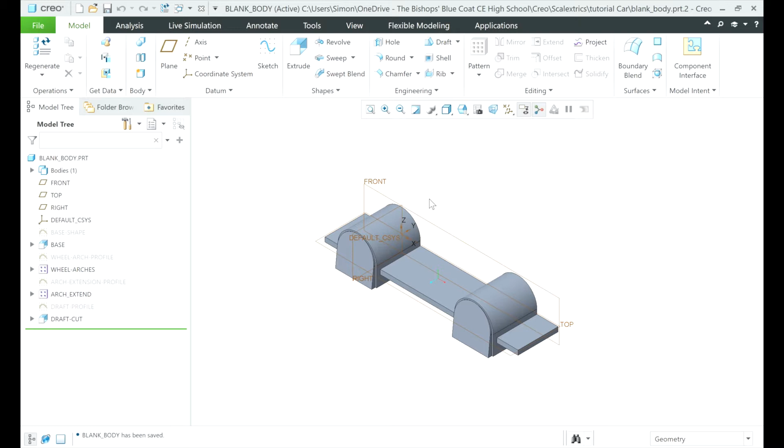We've loaded the blank body from the Scalextric4Schools Facebook page in the files section. I'm going to orientate it so I can see it from its side view, because we're going to add an image to the side that we can use to help trace around the outline of the shape. So I'll go up to View, then find one of the hidden images, which is under Model Display and Images. The toolbar across the top changes.

We click on Import, and I'm going to click on the front plane, as that's the plane I want my image to go on. I've already saved the side elevation in my working directory, so I'll click on that and press Open. You can see in the preview the car we're going to do - it's based on a Golf.

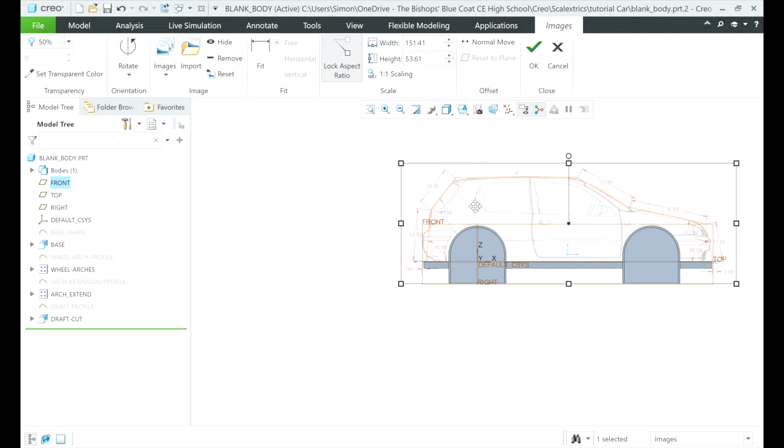Now we just need to manipulate that and move it so it's roughly the same size, so the space between the wheels is roughly the same as what we've got on our block. So we can stretch it. I'll make sure I'm on the front view, and move it until I'm roughly happy that the two wheel arches on the image line up with the two wheel arches on the blank mould. That looks pretty good.

We'll press OK. And while we're in this view, we'll go back to the word model from the top ribbon and click on extrude. I'm going to extrude onto this surface, press extrude onto that front plane.

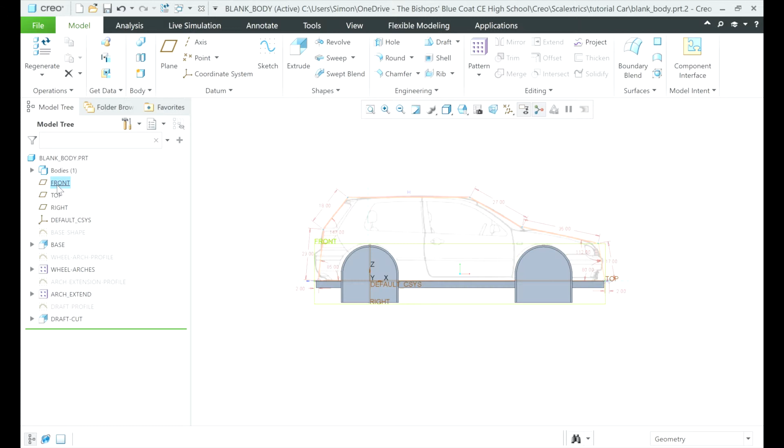So we click the extrude button, and I now need to tell it the front plane. I thought the front plane was already selected, but it doesn't appear to have been. So I'll go under placement and click on the word front from my model tree. You'll notice the ribbon changes again at the top.

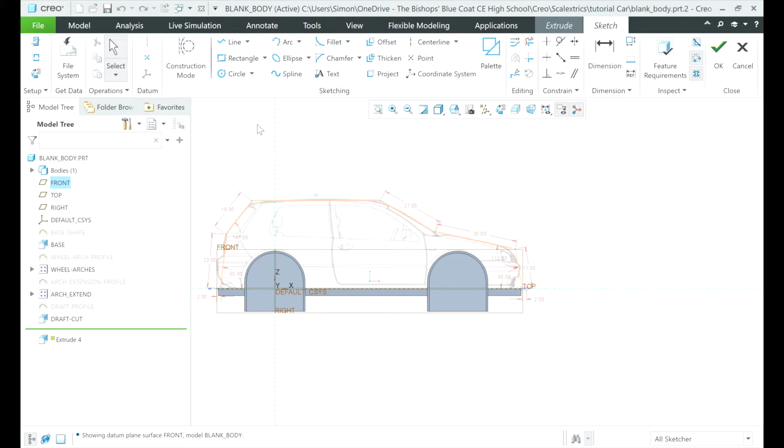And I'm now going to use the line tool and go from one edge to the other. To zoom in I just used my scroll wheel on the mouse and rolled it forward. Now I've decided to keep this pretty square to start off with.

We'll add the curves and rounds a little bit later on. Each time I want to leave a datum point, I'm just clicking once with my mouse - you'll see a little yellow flash appear on the screen. Remember, when I'm zooming in and out, it's just using the scroll wheel on the mouse. So we go down to that bottom point, and I'm going to connect that from one side to the other, using the scroll wheel to zoom out and back in again.

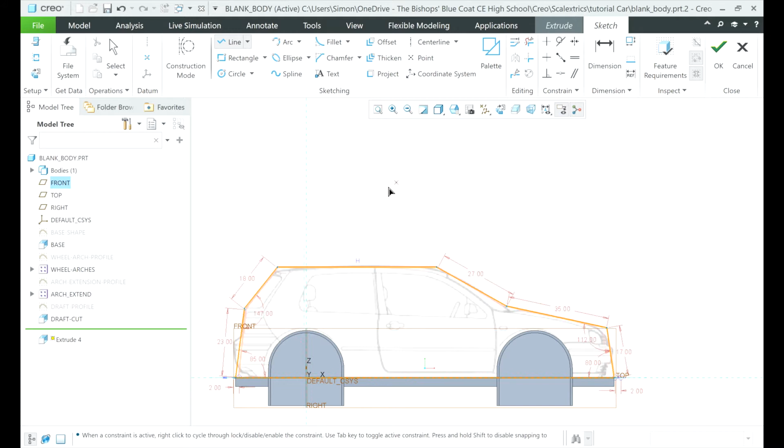So that gives us a completed shape. We can check that by pressing the select button - it's gone nice and yellow, so that's all good and okay. So we've got a completed shape there.

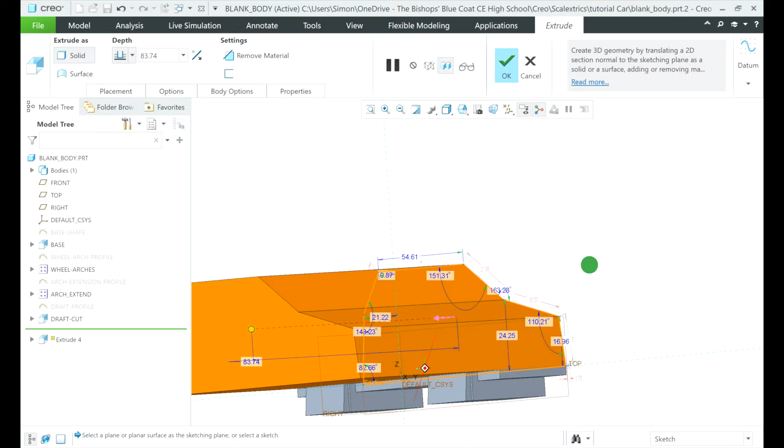So I'm next going to press OK, which is in the top right, the green tick. We press that, and it's now gone orange, which means it's a 3D shape. I just used the scroll wheel there, and by holding it down and moving the mouse, I can orientate the model.

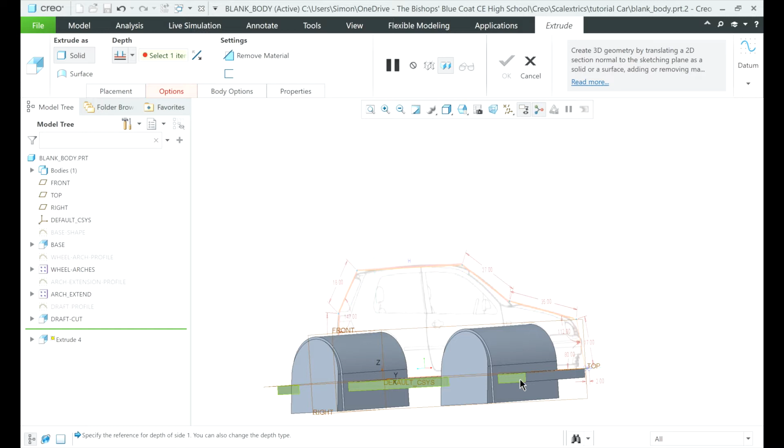Now under the word depth, I'm going to select the little arrow and click the bottom option, which is basically going to align the extrude I've just done to one of the edges we already had on our model. I'll click on that thin edge just there - it's highlighted green. So I now know the width of the car is locked into that base. We can just press OK to say we're happy with that.

Now we've got that basic shape. It is quite blocky, it's got lots of angles on it, so we're just going to soften these off. This is a part where it's up to you which angles or radiuses you use on your curves. So we go to the round tool, which is below where it says flexible modeling, and I'm going to start clicking on some of these edges and rounding them off. Quite often this is just done by eye, what looks right.

So I can just drag the little parts there. If you wanted to zoom in, you could use the scroll wheel. I'm just dragging that round until I'm happy with it, then move on to the next one. Now that's at 6.57. Once we're happy, we'll click off and decide what round we want to do.

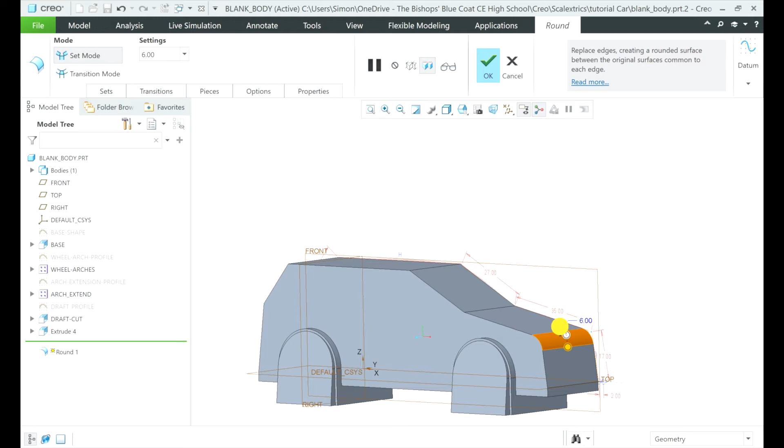Again, these are personal to you. You don't have to follow the exact measurements when doing the round. So I'm going to press OK, and I'm going to leave that rounded.

Spin the mouse around using the middle mouse button or the scroll wheel so we can see the other side of the car. I'm now going to start applying some rounds to the car to give it a bit more of a streamlined and more modern shape.

So I'm going to click on this back one first, just on that edge, and again find the two little yellow dots, get your mouse on one of them and just drag it out. You might need to use the scroll wheel just to zoom in.

So there we go, we just zoom in there so we can see them little dots, and I'll grab one of them and start pulling it out, and you can see as I pull the mouse away, the radius of that curve increases. So 8.5, we're quite happy with that. It looks okay. We could go more if we wanted to.

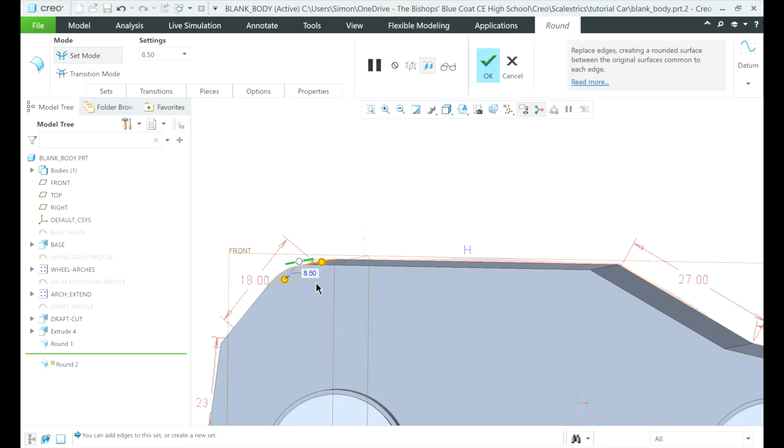So I'm going to stay with that radius. I'm just going to increase it up to 12, and click on a few of the other lines. Let's just stay with that 12 radius for the time being. Again, remember, it's personal to you. If you want to change these numbers, do what works for you. It's your design, remember.

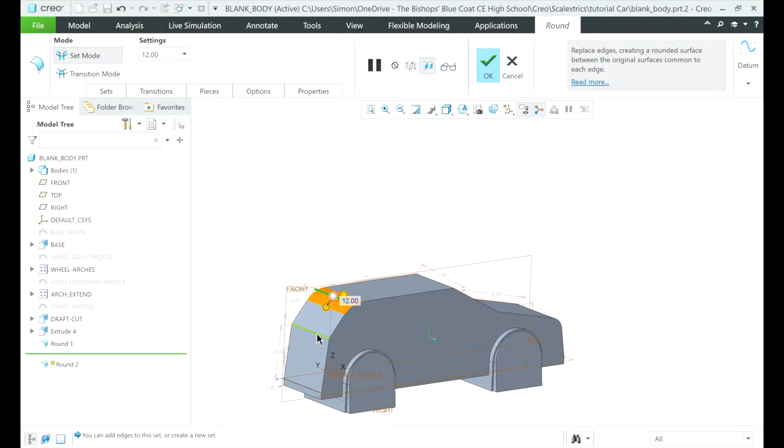So I'm just going to use the middle mouse button, spin it round on that scroll wheel, click the back one there, hold down the scroll wheel and move my mouse. I'm going to click on the top by the A pillar, and then again at the bottom by the edge of the windscreen, or where the windscreen would be. Once I'm happy with that, I'm going to press OK.

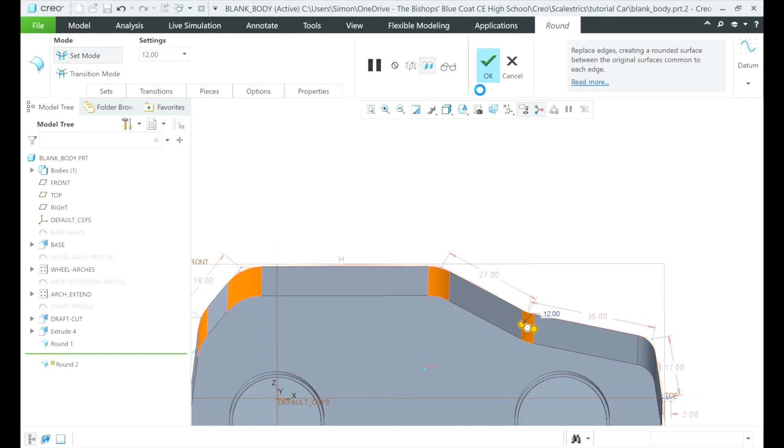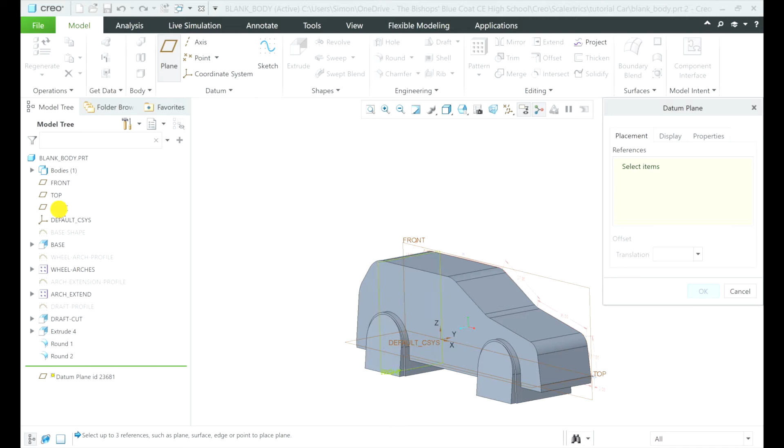My middle mouse button again on that scroll wheel, and what I'm going to do is put a work plane at the front of the car, just so we can do that front elevation. So we click on plane, I'm going to click the right work plane, so I can do that from the model tree if you can't quite find it, and it comes up 105. I'm just going to make that 110 just to ensure I've got clearance from the front of the car. When I'm happy with that, we're going to press OK.

Now what we're going to do is repeat our first step where we added the image. So we go up to View, click on Model Display, click on Images, click on Import, and select that new plane we just created, and again Working Directory, this time the front elevation. So you can see the picture of the front of the car there. It's coming on the wrong plane, so the wrong way up, so we can just rotate that round.

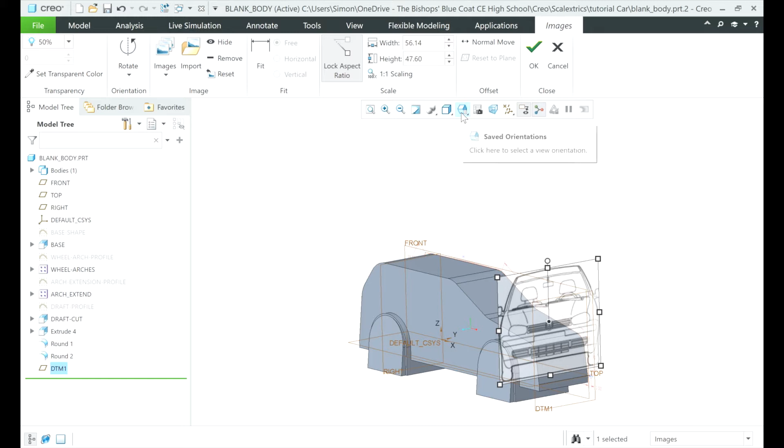This time, when we are manipulating it, we're going to click the right plane, so we can just click there on Saved Orientations and click right. Clicked front by mistake, because I'm thinking it's the front of the car, but we want to click the right because that's the plane we're looking at.

This time we want to manipulate it so that half the car, or the middle of the car, is lined up with the edge of the block. We can then ensure the roof, wheel arches, and everything are roughly in proportion. So again, scroll wheel will let you zoom in, and we're just going to manipulate that until we're happy with our positioning. We can move it up and down until we're roughly happy with it. If it's not perfect, it's not going to matter too much.

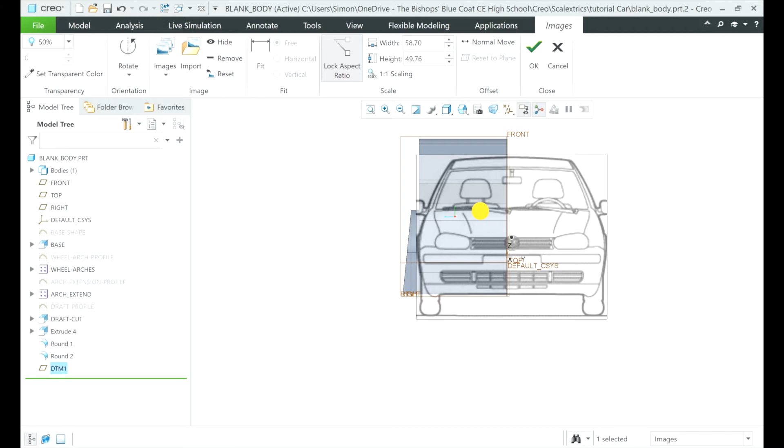Remember, this is just as a guide to help you. It's not set in stone. We can change and make changes from that. I'm just going to stretch that up until I'm happy with it, and when I'm happy with it, just like before, we will press the green tick.

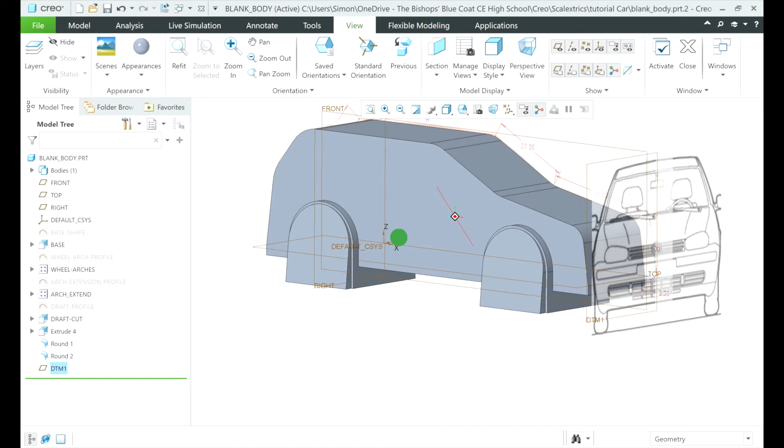Once we press the green tick, middle mouse, I'm just going to spin it round on that scroll wheel. I'm going to show you an alternative way first, which is using the chamfer. You may wish to use this. It's entirely up to you.

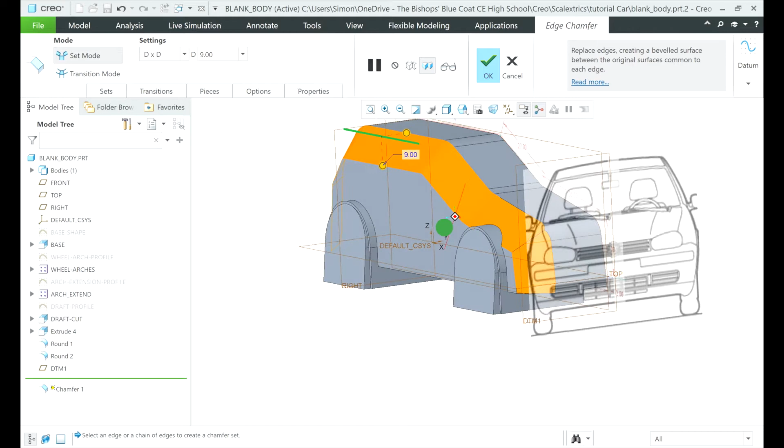So I click chamfer, very similar to a round, but it's putting a chamfer on the edge. We can drag that down and you can create a chamfer. Now you might decide that's right for your design, you might not, it's entirely up to you. In this instance, I don't think it's quite right, the look I'm looking for on this design.

So I'll just press cancel. We've previewed it, we're not happy. We've done some development as we've gone on, so we can press cancel and press yes.

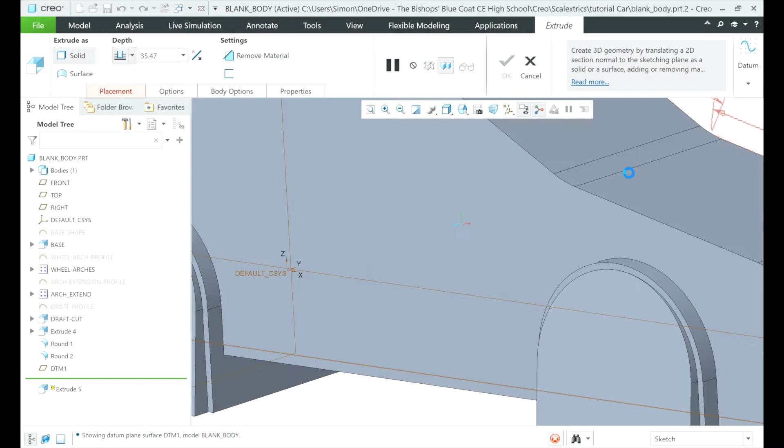And this time I'll click on extrude, and that plane we created at the front where the image of the car is, so it's going to spin around there. And all I'm going to do is draw a line down on the diagonal to cut off that section.

So I'm going to click on the line tool, click once where I want the line to start, go up on the diagonal, roughly the angle I want to the top of the block, along, and then just connect back to that original line. We'll check that that's all okay, it looks fine there.

So if we then go and press the green tick, it's coloured in orange, and all I'm going to do is reverse the direction with that little arrow there and pull the whole thing back so it looks like we've added it onto the model, and then click remove material. And it's as easy as that. We've just taken off that angle now.

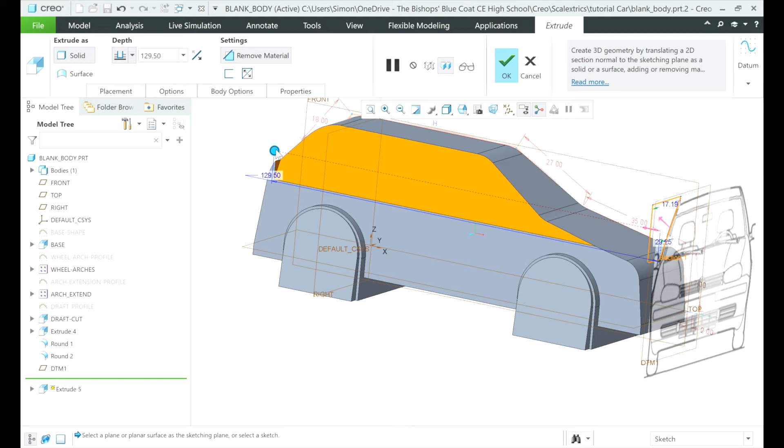We can middle mouse it just to check, make sure we've gone all the way through the car design, and then press OK. Every time, this is just the middle mouse there, I'm just viewing it from a different angle so we can see what we're going to do next.

So we're going to round it off next, and I'm going to click on the roof, and you can see the trail in yellow, or orange, that's the parts that are all being rounded the same. I want the back edge to be rounded the same, so I can click on that as well, and it should then merge the two rounds together.

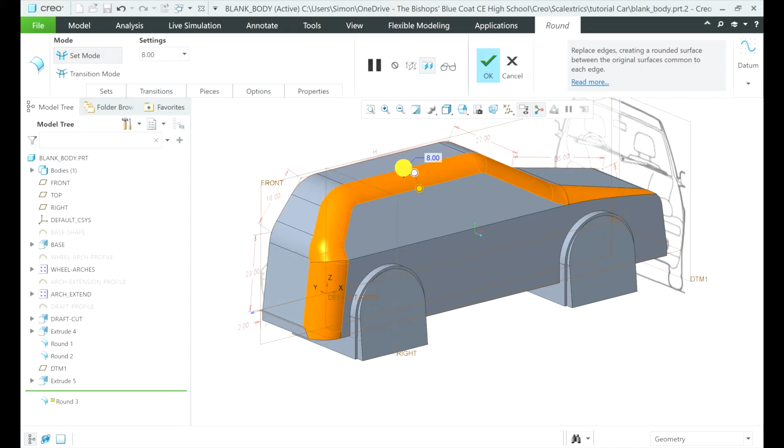And we'll just try, just see if we can get any more of a round off that. We might not be able to. We can get to 11 there, but find something that you're comfortable with and looks correct. Press the green tick.

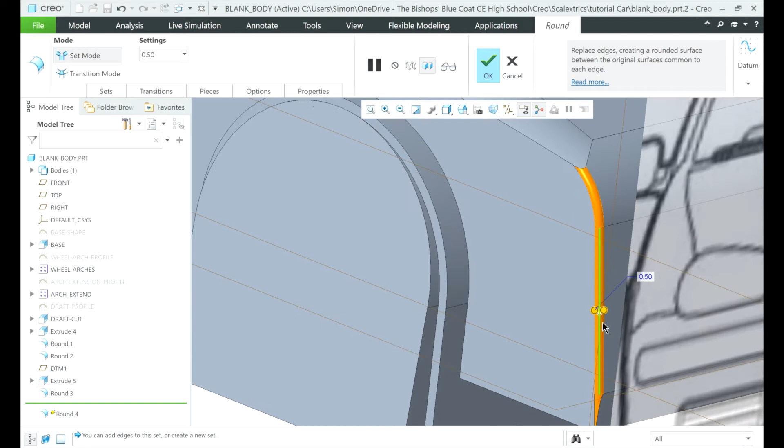I'm now going to move around to the front of the car, and I've just got a little bit of sorting out around the front here to do, just where the angles have come in on each other. So click that one, and if it doesn't like a round, and sometimes that will happen, you won't get quite the round you want to, and you might have to go and fix something else first.

So you can see there I can get a very small round, it doesn't quite like what I'm doing. So all we do is I go back a step, so I press the cancel button in this occasion. I don't want to cancel, I'll cancel that quite happily.

And I'm now going to look at rounding off this edge just in there, just to soften that down. And you'll notice as I do that, that round is going to help connect the two bits together. So I've got to find the right number, so it's just in there, 7 looks about right.

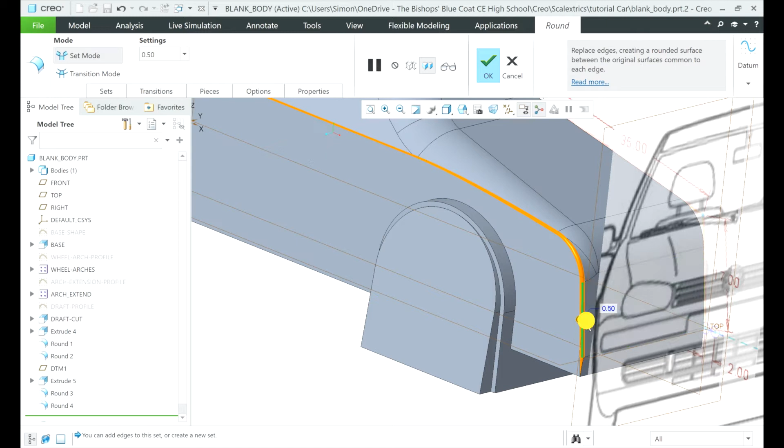Now hopefully when we round this edge now, because we've done it in a different order, and it's liked it, you can see it's going all the way along the body of the car there. So I'll just pull out my markers there and just see what sort of round we get and what I'm happy with. So it might be 4.5, I think 5, that'll do us. We'll tick it off there, and we've now got the rounded part of the car.

Now, if you're going to CNC the car body and do some vacuum forming, we've only got one more step to do, because obviously things like windows and that are not going to put into our mould for the CNC car. So what we do now is we go over to the model tree, we click on the blank body, so we're highlighting everything.

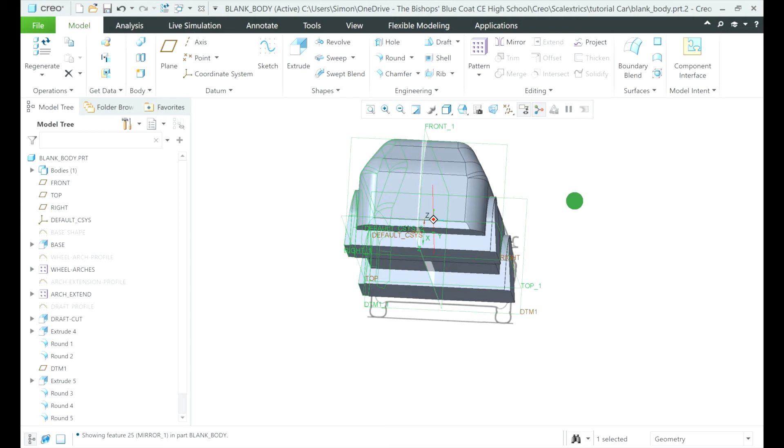We click mirror and click on the front plane and press OK. And what you'll get there as I spin it around is that's your CNC block that you can then machine and make your vac formed cars from, or your vac formed car bodies from. So that's the first step complete.

Okay, so for the next part of the tutorial, we're going to be concentrating on adding some details, things like the windows and that into our car, to get this car ready to be 3D printed.

Before we go any further, I'm just going to click on File, click Save As, save a copy, and type in the file name so I know this is my CNC car when I want to come back to it, then press OK when that's done.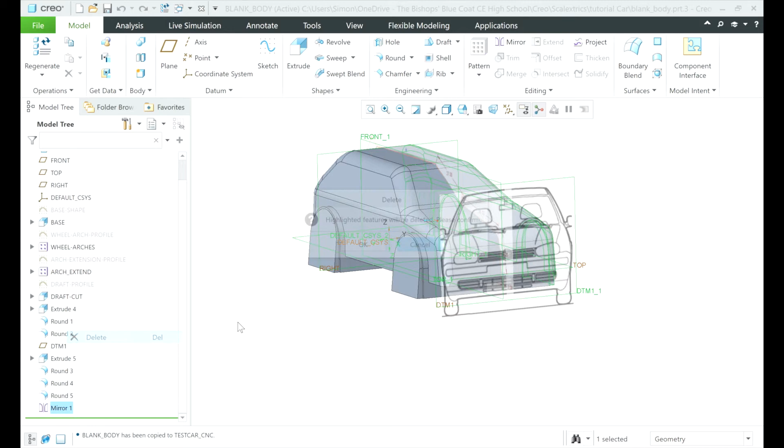Next up, I'm just going to scroll to the bottom of the model tree, right click on mirror 1 and press delete, so we're just going to get rid of that mirror. It's the last thing we're going to add on when we finished our car design. You can see we're back to half the car.

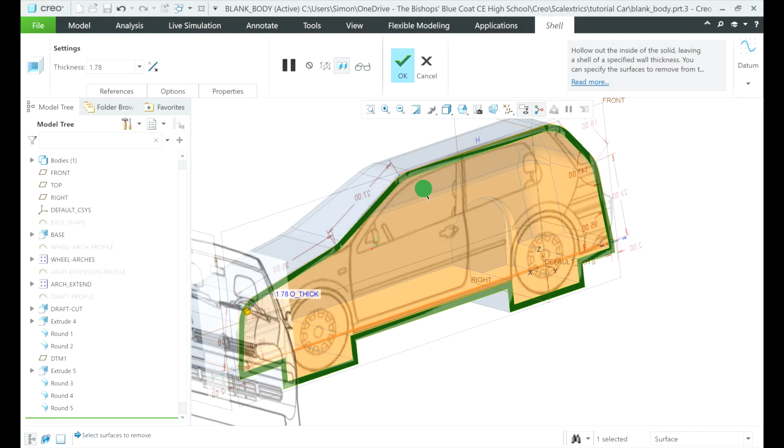We'll leave these images on for the moment, I think, because they'll help us with some reference points. Next up, we're going to shell it, so click on the word shell and click on the side there. It's shelling everything inside. You can set your thickness - around 2 millimeters is probably good enough for what we need. Now that's completely shelled the inside of the car.

Now when it comes to adding the windows and doors, you've got two options. You can either work on that face where we've got the image and trace the windows and doors positions exactly across, which is perfectly fine. Or what I prefer to do is spin it around so I can see the other side of the car and just see where them lines are for the rounds. I prefer to work with the rounds in my own preference, but it's your design, completely up to you, so I'd prefer to work from this side.

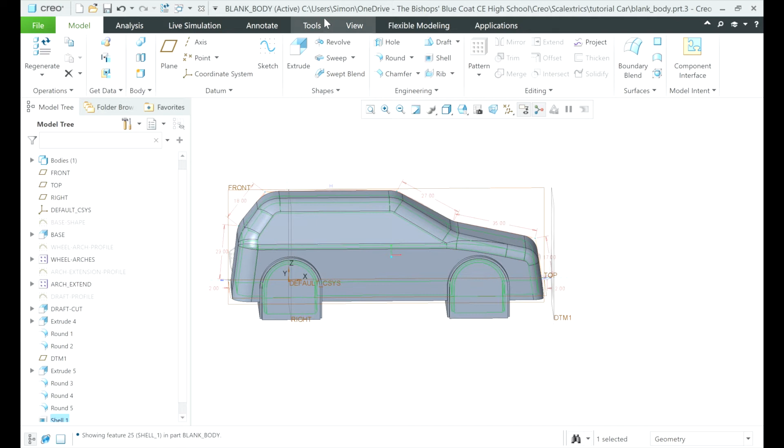I'll click on extrude and click on front, then I'll just zoom in with that scroll wheel to get a decent size. Now what I want to do is click on the project button and then click on the lines I want to project onto my sketch.

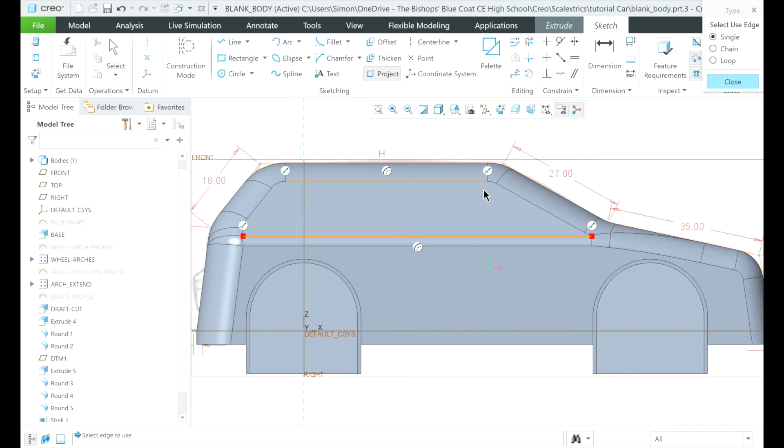So the bottom one there, then just click on any other line. I'll click all of these lines and project out that whole shape, again using the zoom in with the scroll wheel, so we go down to there. We'll have to probably draw in that little piece. Zoom back out and go do the other end, so just click these lines.

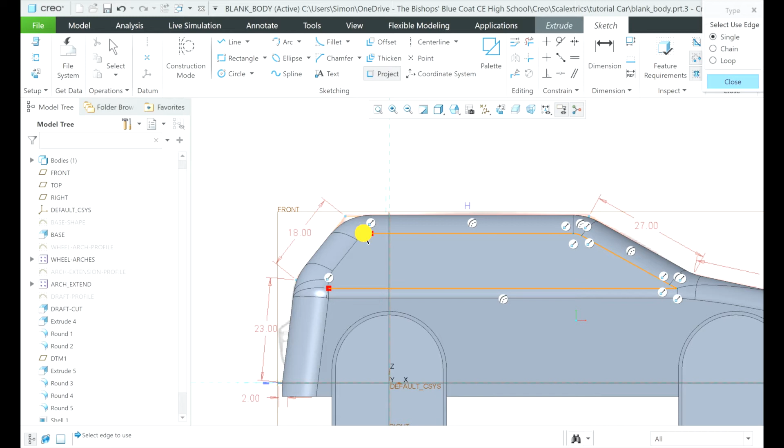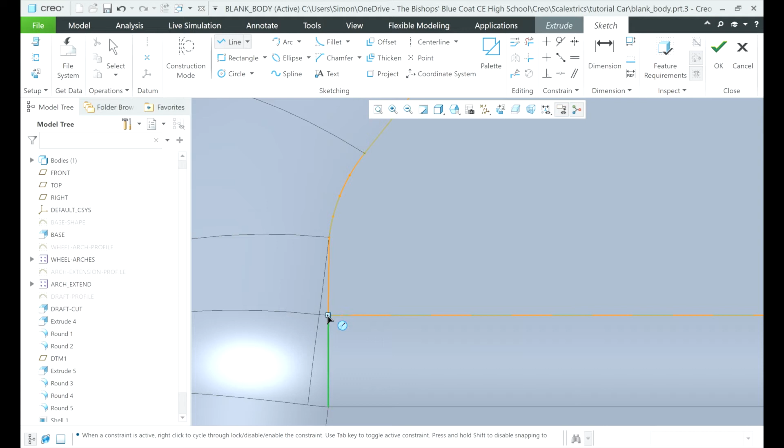Zooming in. Now occasionally when you use the project, you might end up with an issue like that where we just need to go back to the line tool and make sure we connect the two red dots. Those two red dots tell us that your sketch is incomplete - you've not created a solid boundary. So we can do that, zoom back out.

I'm going to stay on the line tool and put in my pillars for the front and back windows. I'll do these on a slight slant, I think, to make it look a bit more aerodynamic, so one diagonally down there. Now when you use the line tool, it does leave like a tail on the end, so it keeps connecting between the dots. I'm just going to leave that one in the middle there, click again, so I've got my two diagonal lines.

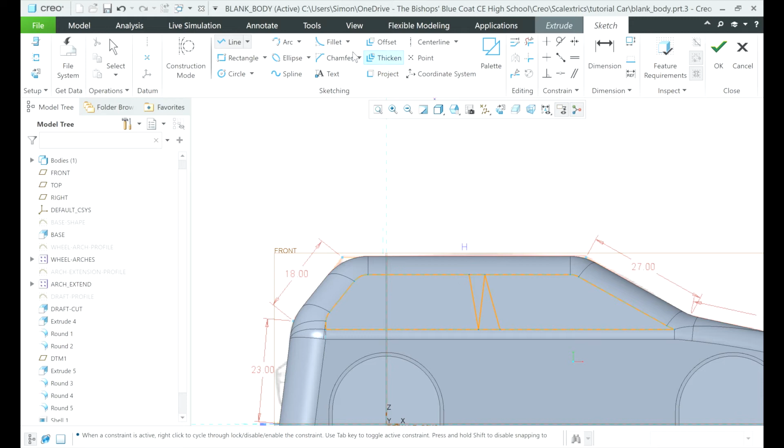Middle mouse button, stop drawing, and go up to the delete line - it's just up there, not labelled with delete, but it sits below applications. I'll delete that line, and then delete the line at the top and bottom.

So that creates my two shapes for my side windows, just zoom in and see that. You can see it's on that back plane, and we'll project it through the model now, so I press OK. Everything looks good, so it goes that nice bright orange colour, and I'm just going to change it to remove material, and that will then take out the insides there. You can now see that shell we created previously a bit clearer there.

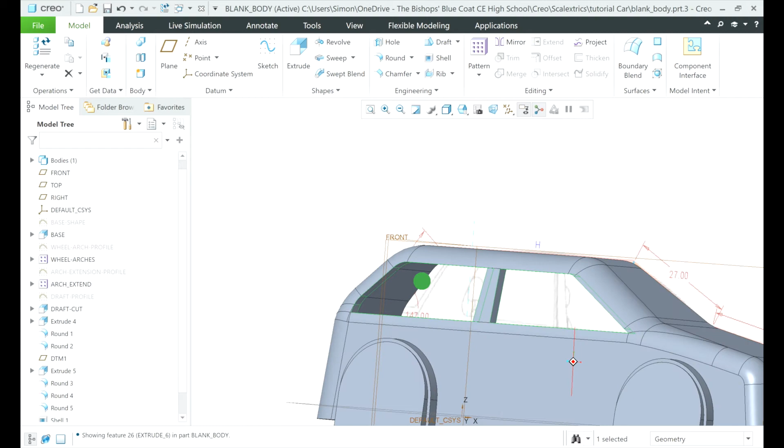Now again, the next bit is going to be up to you how you want to do it. I'm just going to look to round off some of these corners and make the whole thing a little bit smoother. So I'll show you the first one and then I'll speed up the video and come back to you once we've done that.

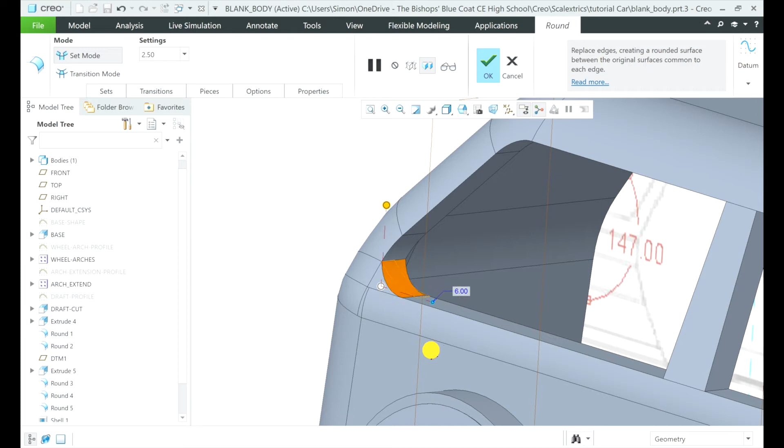I'm just going to click on that little edge there and round that off, and again use the drag, the two little dots, just to drag it round and see what sort of round you can get. When we're happy with it, I'll go on and click some others and add some rounds to them windows.

Now we just need to be careful sometimes when applying a round, so I'm going to apply a round to that edge there. But because I've got different geometry coming in at different angles, you'll notice it doesn't quite do what I wanted it to do. So occasionally we do have to make some sacrifices.

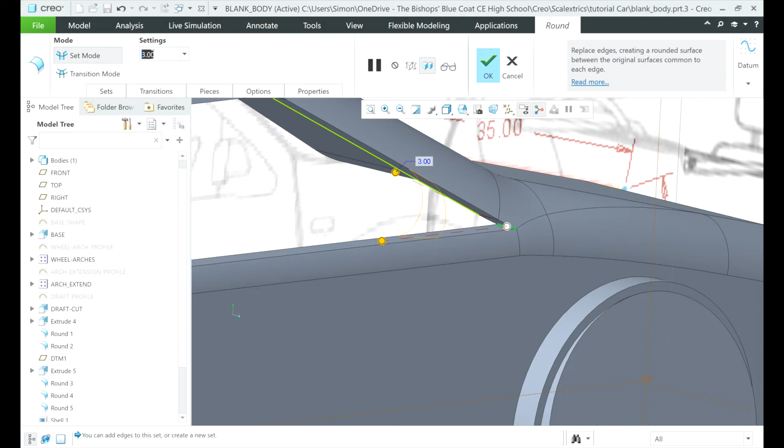So I'm just going to have to make that a smaller number. I think I'm on 3 there, take that down to 2. 2 doesn't work, so we'll try 1. Well, 2 has decided to work now. And you can just see how it's slightly different, but it'll be fine for what we're going to do.

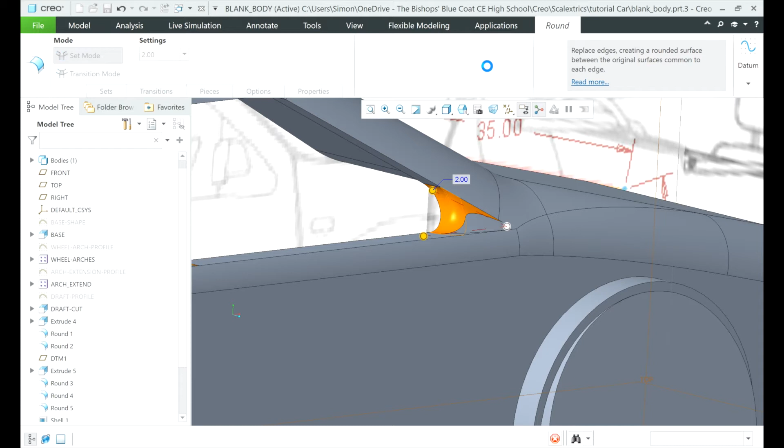So once I'm happy with that, we'll press OK and move on. So once that's loaded up, we can press OK, and I'll just show you a little bit of what's gone on there. It's just where it's slightly intersecting and intersecting geometry on that point. It's nothing too much to worry about.

We could go back and fix it if we really wanted to, but it'd be fine for what you're doing. So I'm just going to move the car around now and start thinking about adding some of our other details to it. So we've got to add things like the windscreen and the back window, and then we'll remove the wheel arches and things and just finish the car off.

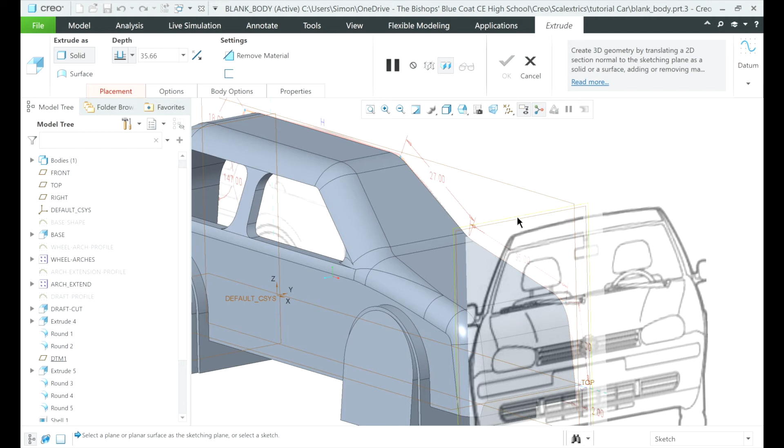So I'm going to click on extrude, and then we'll select that plane where we've got that sketch or the image of the front view of the car. Now your two options are to use the image there and trace out your windscreen, but mine's slightly out of line, so I'm going to click project, and as I hold down the middle mouse button and spin it around, you can see quite clearly that my windscreen is a bit higher.

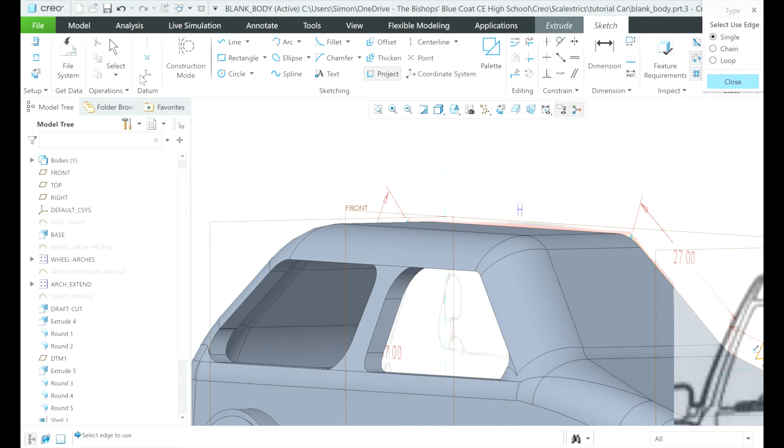So I'm going to click on these lines and using the project, so 1, 2, and 3. They're just off the page at the moment, you can't quite see them. But when I go over to the left hand side, below File, the 3rd button down, you'll notice it's spun round, and then we can just use the scroll wheel to zoom in.

Now those 2 red dots you've got there, all they're telling me is that the sketch is incomplete, it's not a closed boundary. So we use the line tool, click at the top, so 1 click there to start drawing. I'm just going to extend it past the line just to make sure I get everything, and back round to click, and then to get rid of the tail, it's the middle mouse button.

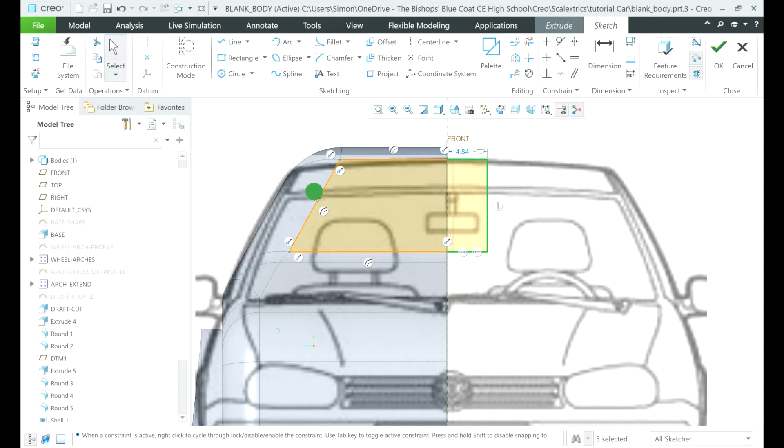We'll check everything's okay by pressing the select button. So it's all highlighted in yellow, so we know that's okay. I'll just spin it around so you can see what's going to happen. We're going to press OK now, and then we're going to take the whole thing through.

So we're just, that little button there, little line, just click on the arrow. The mouse is on it now, it's changed direction. I'll just scroll wheel out and then take the whole thing and take that all the way through the car to get rid of the front and back, or to create a front and back window. So it goes straight the way through.

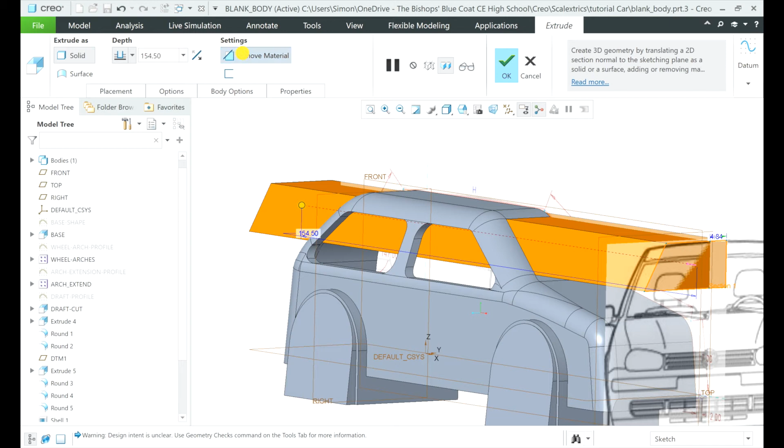So it looks like there's a big block through the middle, so we just need to now press remove material. So that's given us a front windscreen, so we can press OK. I'm not overly happy with the position of the back windscreen, so we'll do something about that next. So click OK, and now we're going to tackle this problematic back windscreen.

So I'm just going to maneuver the car around, click on extrude and zoom in and click on that edge. So we go up and click on the extrude button, use my scroll wheel to zoom in and just click on that edge there, and then once we do that, there, we've got it. It's going to spin round so we're looking directly down onto that edge.

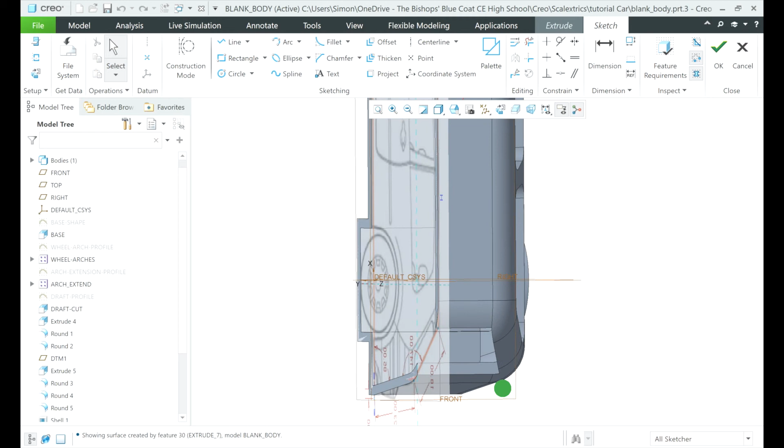Now all I'm going to do is scroll in, find that corner, so I have to tilt it slightly using the middle mouse button. Might need to scroll in a bit more as well, so just position it through, scroll in so you can just see that edge there, and once again we use the project tool, so we just know we're definitely getting on that edge there. So we'll click on that project tool now.

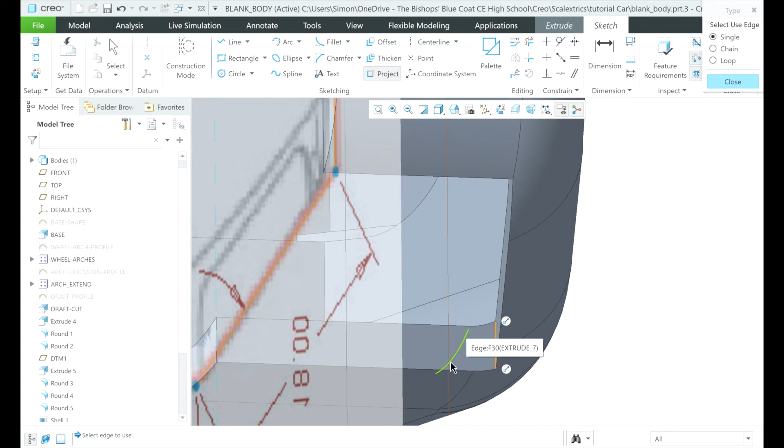I'll go back to my sketch view, so I'm looking directly on top of it again. That will just make things a bit easy for us. So it's just there, the 3rd button down below File. I'll probably need to scroll out a little bit just so you can see that there.

And all I'm going to do is use the line tool to connect both of those points up. So we'll go from the top there, so we click there. Now I have made a little mistake here, you'll see it in a moment. My model actually snapped to the grid, or to another point, rather than the end of that line.

So we go down, connect it all up. I'm about to think everything looks okay there, but when I go to press the tick, we've got that red message. So we'll press no, we don't want to exit the sketcher, we want to go back and fix it. I'll click on no there.

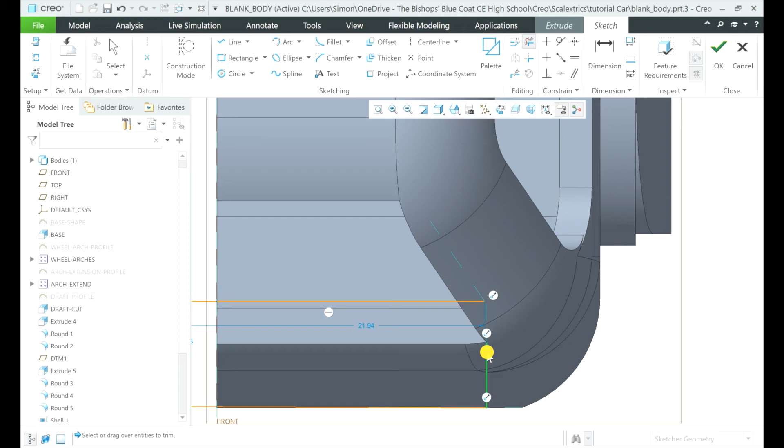I'm going to scroll in and see what's going on, and what I probably need to do is just go and delete that line. Click on the delete one, it's just there, delete that bit of line. I'll delete both parts of that line, and all I'm going to do is put a new line in, going from one side to the other, so I know there's no joints or gaps that I might have missed, and we could be talking fractions of a millimetre at this point.

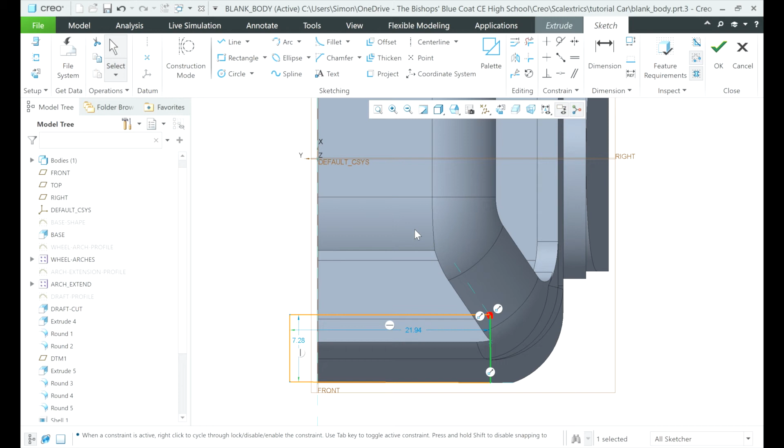So click in there to stop the line drawing. Remember, it's that middle mouse button that gets rid of that. I'll check it this time, so still see it showing up with a slight error, so I'll just zoom in this time, and you'll notice there's a slight gap, probably fractions of a millimetre.

So all I do is I just connect them 2 points up with the line tool. From one, click, join up the other one, click, and we middle mouse button to stop the line. I can then, when I'm happy, this time it will go yellow. I'll press the green tick.

And then I'm just going to decide, so I'll spin it round, how low do I want my boot to go. So again, the arrow changes direction, and we press remove material so you can see what's going on there, and I'm just going to drag that up so it's roughly in line with that curve that's coming in from the right hand side there. So up, up, up, so we get to about there. That looks about right. When I'm happy with it, I'll press the green tick.

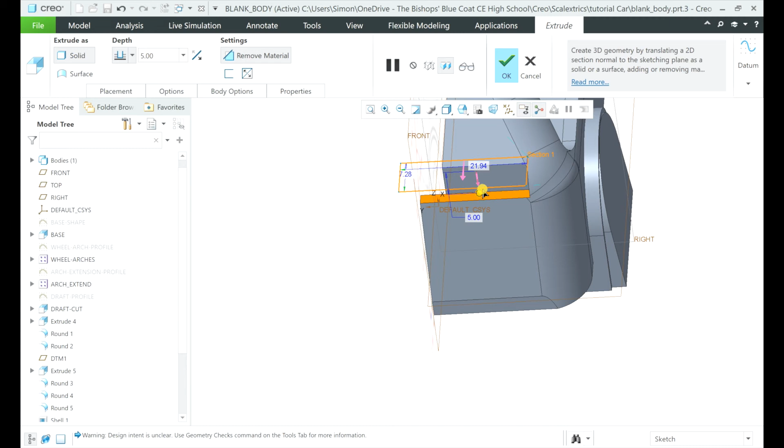And we'll move on to the final part of the tutorial, which is going to be looking at the wheel arches and cutting them out. So we press OK now, and we'll go on to the next stage. Again, it's the middle mouse button there, spins it round.

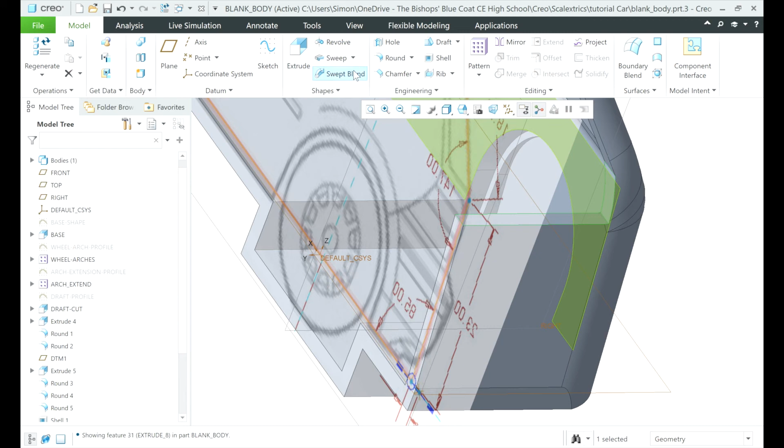We can now see that looks a lot better. I'm going to put a couple of rounds in just to soften that edge off and just make it a little bit more nicer. So we click on the round there. I'm going to make sure I get right into that corner, so the scroll wheel in to zoom in. I'll click on that first one up there, sort of one. I probably want more than a 1mm round on it, so I can drag it round and see what it looks like.

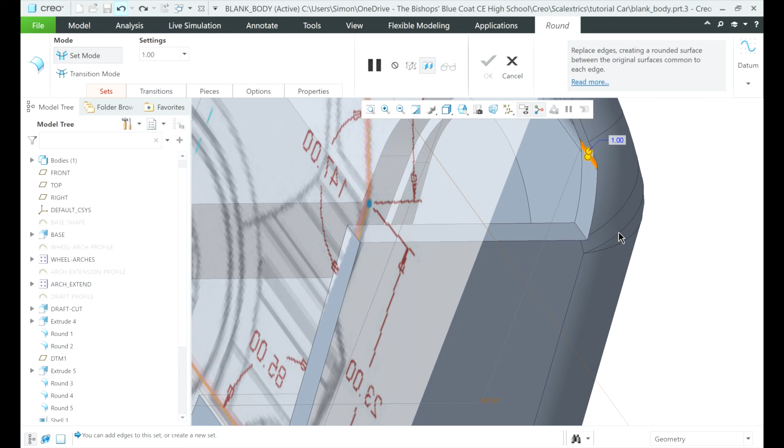Just try and get hold of it. If it does do that, don't worry, just go and press the undo key. Just means you've selected the wrong thing. Press the undo key, and we'll go a little bit more, so I'll just see what I'm doing. Make sure I pick up one of them points, and I'll just drag that down and put in that larger round there. So now we've got hold of that. You can see it's rounding it off. It's growing as I'm pulling it away.

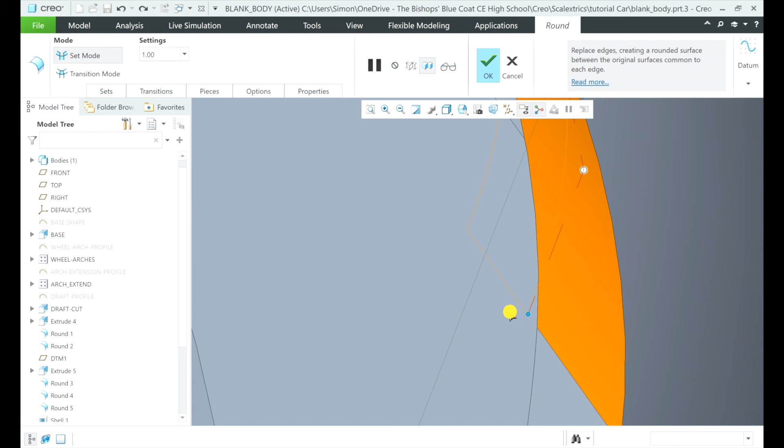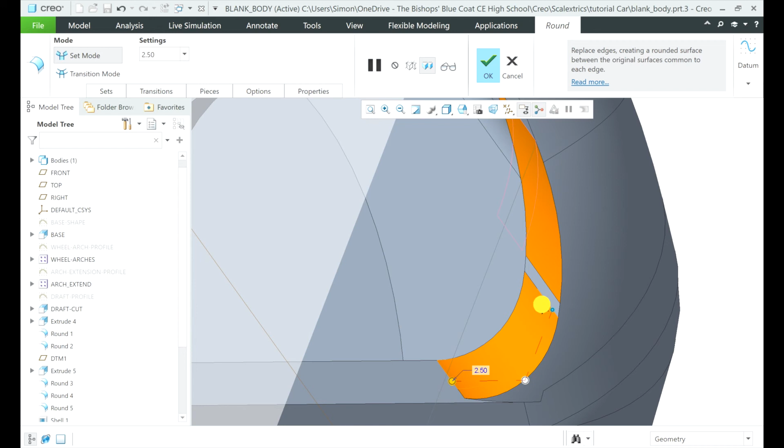And when I'm happy with it, I'll zoom out. So that looks quite nice. We'll try the same round in the bottom corner there. So that doesn't work this time. So what I can do is this time reduce the amount, so I can bring it down until we get something that we're happy with. When we're happy, we press the tick, and we've got that same round there.

Now you can spend a lot longer doing rounds and working on the overall appearance of the car. Again, this is just a quick tutorial just to get you started and show you some of the basics when modelling the Scalextric car. So I've just spun the car around using my middle mouse button, so I'm now looking at the side. I'm going to press extrude.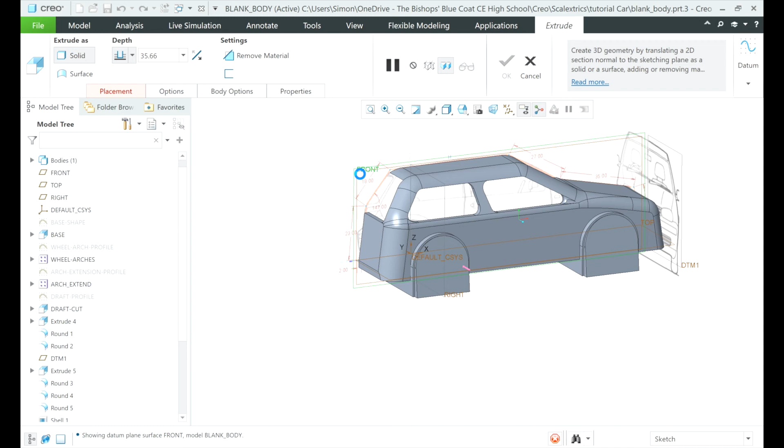We're going to click on the wheel arches there, but we can do it better doing it on the front, because if you notice them wheel arches, they are slightly on an angle, so the projection would go through at an angle. Now again, it's that favourite button we've been using a lot today. We're going to use that project tool, and I'm going to project the line for the inner part of the wheel arch. So we'll go up to project. You could sit there and work out the circle and things, but we've got the tool there. It's going to make your life a lot easier.

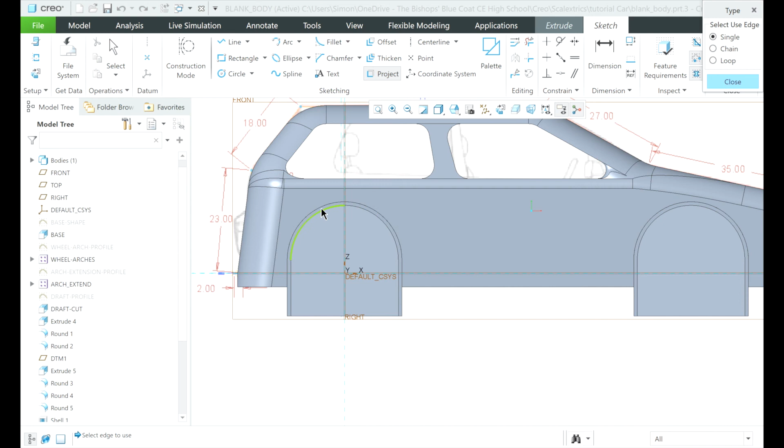So I'll click on project, click the inner of the two radiuses. So I've got to do both sides because there's a split line down the middle there, and we do the ones going down the sides to start us off.

So this is going to remove the internal part of the wheels. We'll click in there, both on this side, so we're creating like two upside down U's.

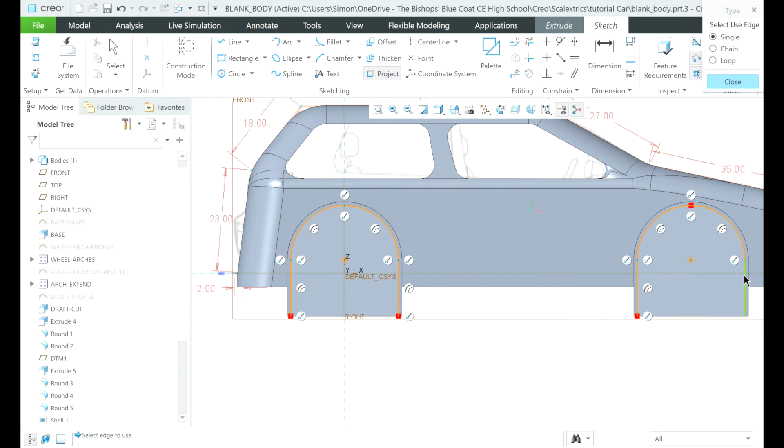Now the other thing I'm going to do, once I finish these, I'm going to go to the rectangle tool, and I just want to draw a line along the base of the car there, because I don't want that to leave this bit that's stuck behind there anywhere. So we're going to go to rectangle. I'm going to click it or snap it to the bottom edge there and start drawing from there. So we're using the center rectangle tool, draw it all the way across both of them, click to finish.

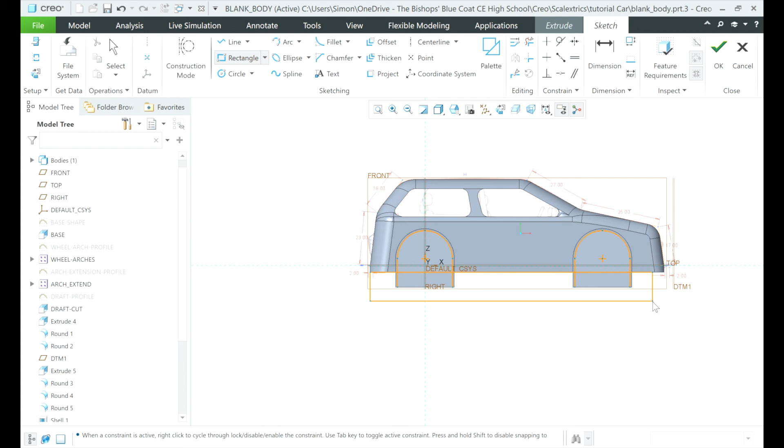And what we'll do is we'll use the delete button, so it's the one below applications. My mouse is just going up to it now. You'll see the yellow flash when I click on it. So it's on there. We're then going to delete these lines.

So 1, 2, 4 on each wheel arch, 3, and then the fourth one. And then we're going to do exactly the same thing on the other wheel arch. So scroll out, move your mouse over, scroll back in to zoom in.

This time it'll only be 3 because we haven't got that split line down it. So 1, 2, and 3.

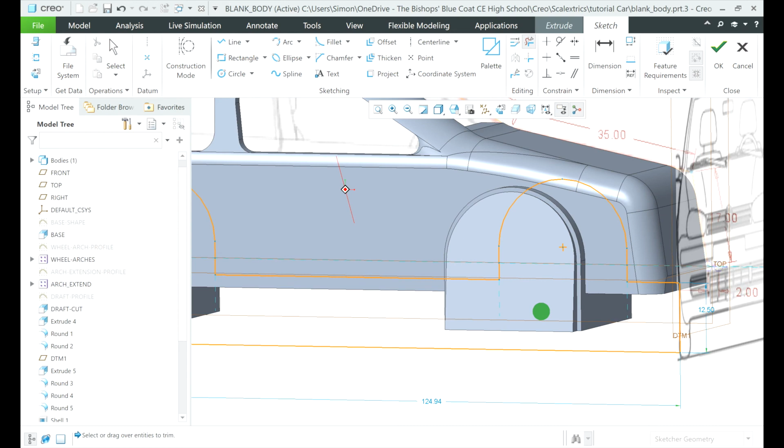Again, everything should now be good. You can see where that is on that face. So we're going to pull it through and extrude everything across. Everything should be good. I'm going to press OK.

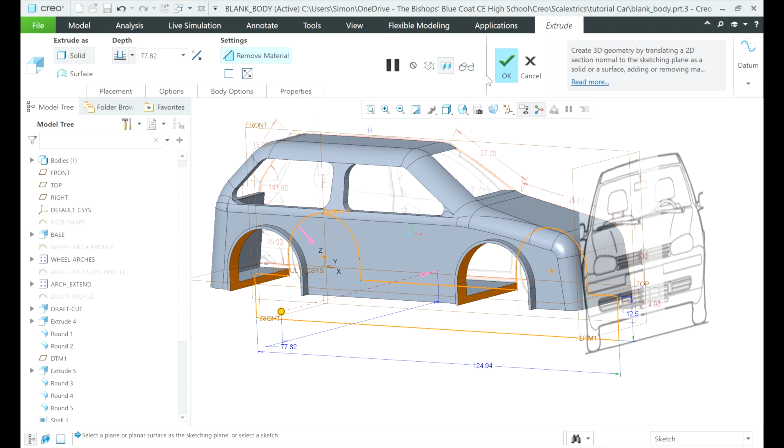It's projected through. And again, all I've got to do now is remove the material, and then press OK. Now in this tutorial, I'm not going to cut out the floor, I'm going to leave that for you. Depending on your chassis and your chassis design, you might want to make different modifications to the base of the car if you're deciding to 3D print it.

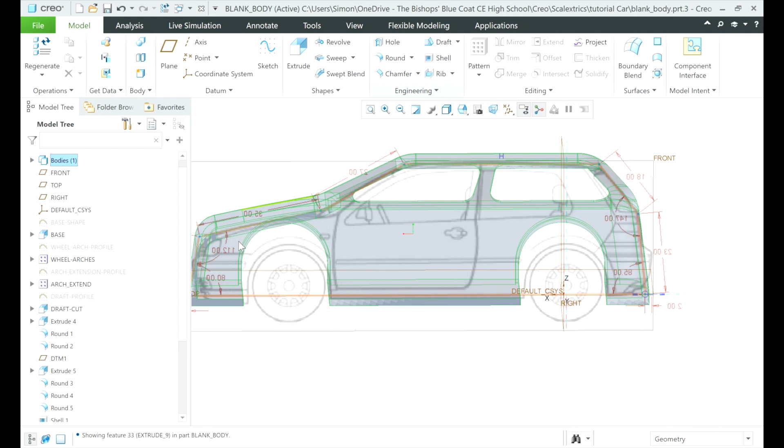So next up, we're going to repeat a step from earlier in the video where we're now going to mirror the half of that body. So bodies is selected on the side there. I'm just middle mousing it so you can see what's going on. So I'm going to click on the very top one. I've got bodies one highlighted, but you need to go right to the top.

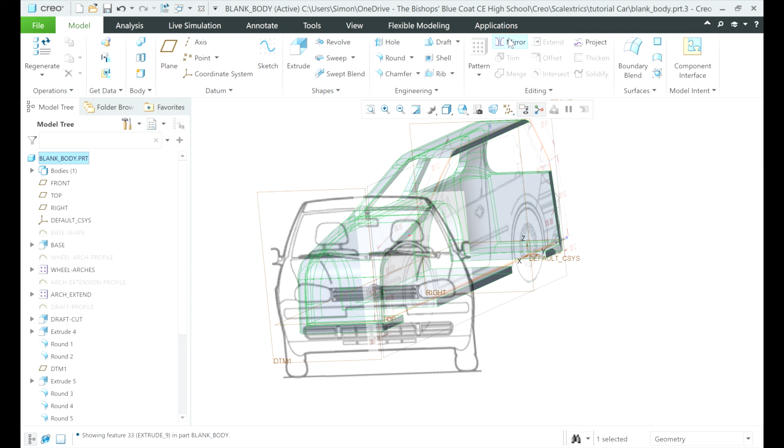So you're mirroring everything. I'm just going to pull my slide bar up to where it says blank body parts. Click that, the whole thing's now highlighted. You'll see the mirror now appears. I can click on that, and I'm going to click on the front plane there. So highlighted, you get the preview. We're going to press OK. And we've got the basic shape of the car created.

Now remember, this tutorial is just to give you a basic introduction. You've got to cut out the base for your own chassis, depending on which chassis you decide to use. They will be slightly different. And then you can spend some time thinking about adding rounds to the wheel arches to make them a bit more like a body kit on it. You can also think about then adding more detail like your lights and everything else.

So, one last thing to do, I think, and that's just click on View, and we're going to remove the sketches. So we go to Model Display, Images. Now you'll notice it says Images there. So if I click the little arrow below it, it shows me both of the images. Now I don't know why.

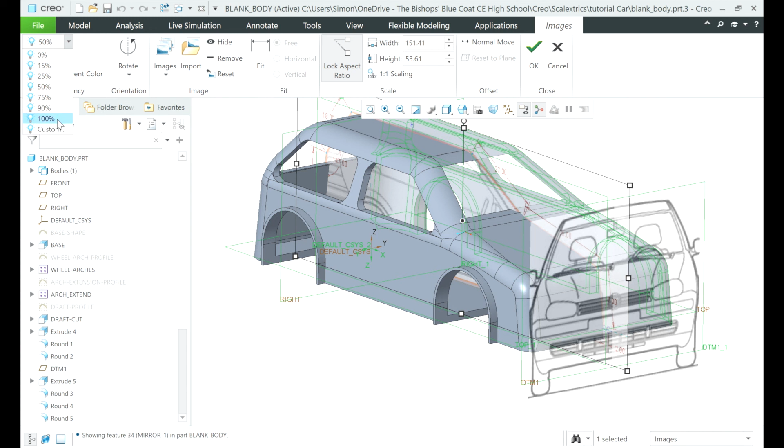I would always thought that you'd put them to 0% to get rid of them, but a little quirk, we have to put them both to 100%. So that will take one away. And then we can go and click on Images again. Select the front elevation this time. Change the light bulb to 100%. And then we press OK.

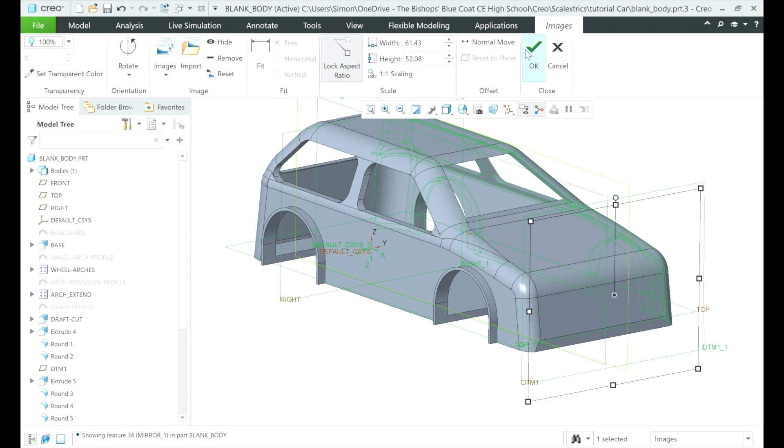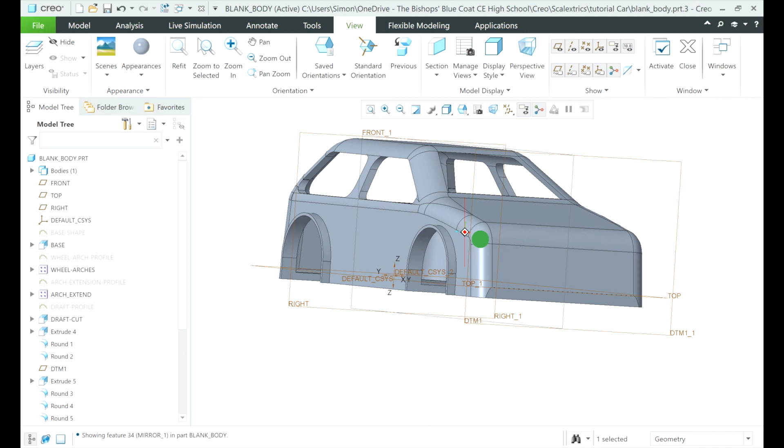So that will give you the basics of a car there. You can now just follow it, adding extrudes, rounds, and start to personalise that. You can put a front grille on it, some headlights. Like we've already said, you could flare the wheel arches out to give it that body kit look. It's really up to you now how you want to personalise the car to make it your own.

So thanks for watching. Hope you found this tutorial useful and just giving you a basic start to designing your own Scalextric car as part of the Scalextric4Schools challenge.